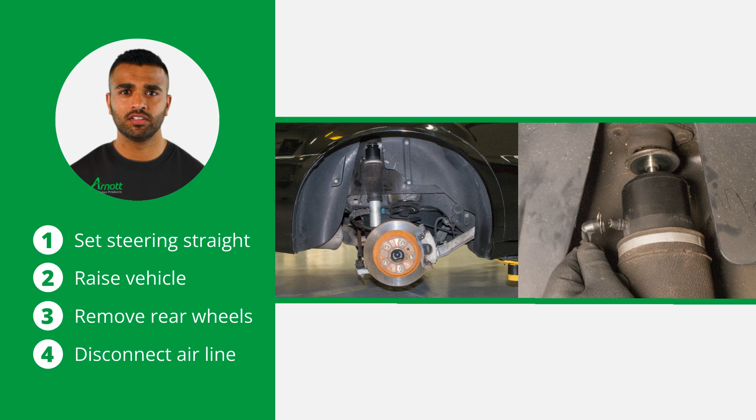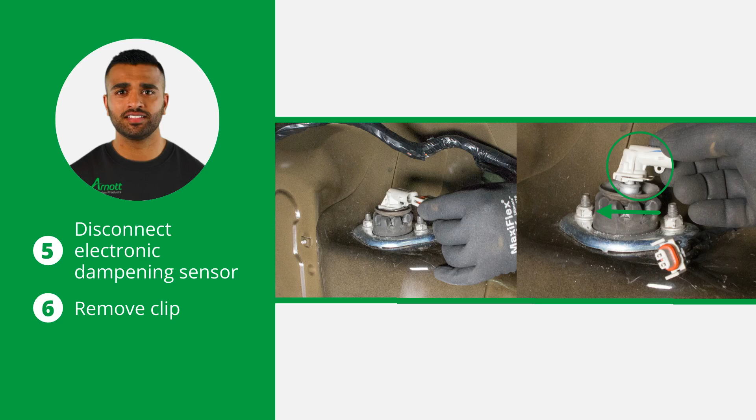With the trunk lining removed, disconnect the electronic dampening sensor from the top of the strut. Then, remove the clip that secures the electronic dampening sensor to the rod, pushing inward to release.

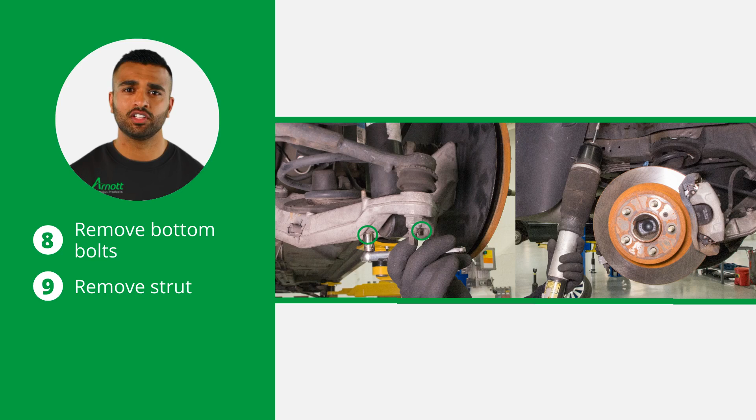Now, loosen and remove the top nut and washer from the top of the strut rod. Remove the bottom bolts securing the strut to the control arm and remove the strut from the vehicle.

Also, remove the U-nuts from the strut. Retain the 2 OE U-nuts for reuse on the new strut.

Tighten all nuts and bolts to the manufacturer's specifications during the air strut installation process. Do not remove the air fitting from the air strut. Doing so may cause damage and/or void the warranty.

Remove the white shipping pin from the new air fitting and insert the airline until fully seated. Now, reattach the 2 U-nuts retained from the previous strut onto the new strut.

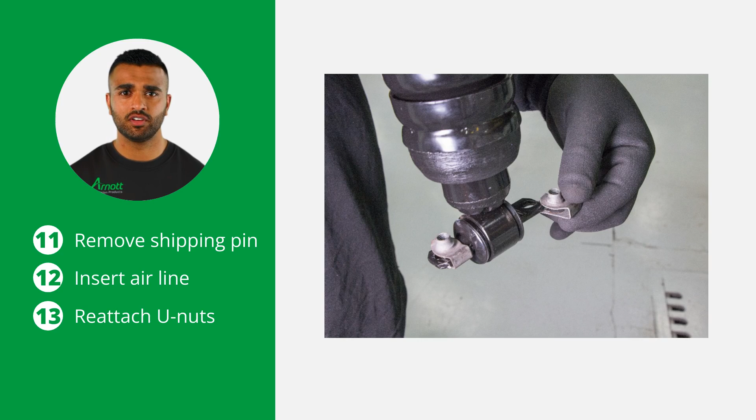Place the new strut into the vehicle. Then bolt the strut into place on the control arm and tighten it.

Now raise the strut until the top of the rod clears the hole. From inside the trunk, apply the washer and supplied nut to the top of the strut and tighten.

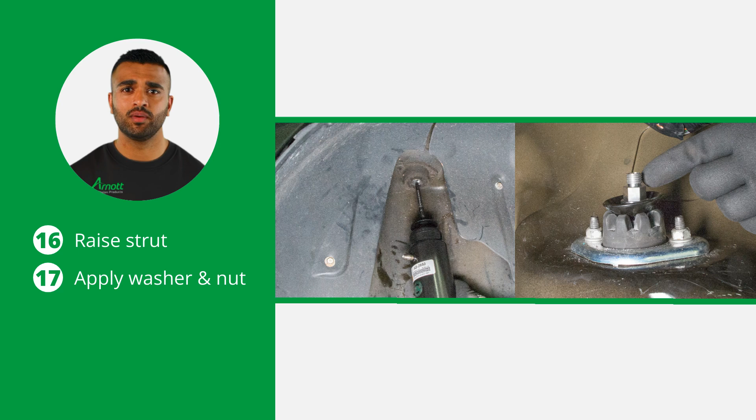Install the new electronic dampening sensor onto the top of the shock rod. Attach the electrical connector to the electronic dampening sensor. Then, attach the airline to the strut and reinstall the trunk lining to complete the installation.

Thank you for following our guide on installing an Arnott Rear Air Shock. Proper installation ensures the longevity and performance of your vehicle's suspension system. Stay safe and happy repairing.